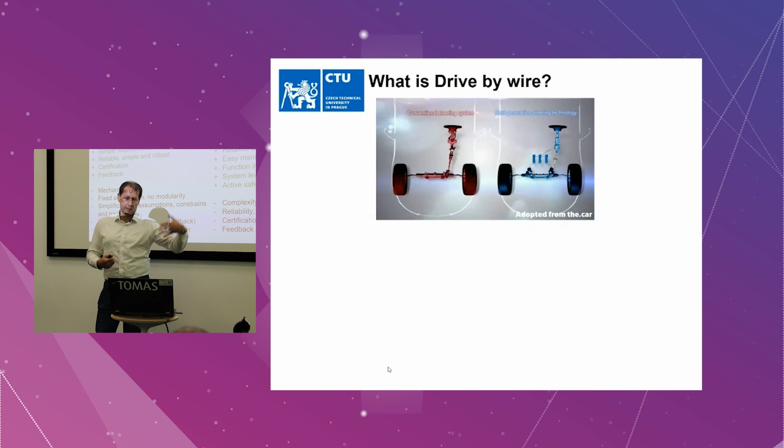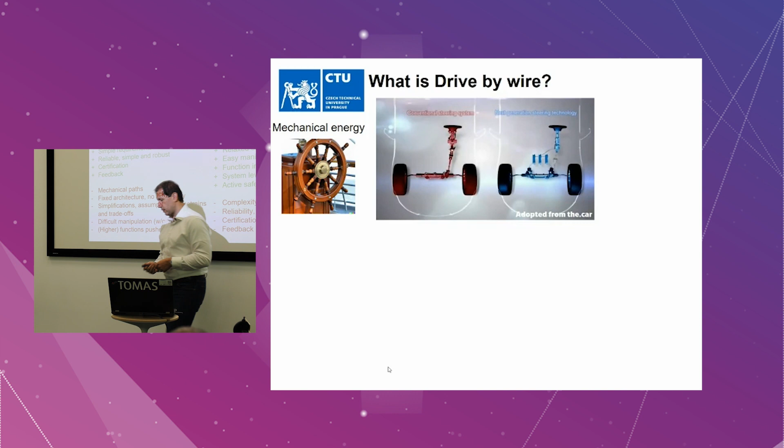So first, on the conventional setup, the simple requirements of the conventional setup are really straightforward: if there's a steering wheel and I turn it by some factor or value, I want my steered wheel to be turned by the same amount. That's as simple as that. Of course, today's systems, like electronic power steering, are more complicated—don't get me wrong—but at the end it's basically the transmission of mechanical energy from the driver to the system or to the chassis system.

Of course, connected to that, you have a really big chance or advantage in reliability, because you have a really simple and really robust system.

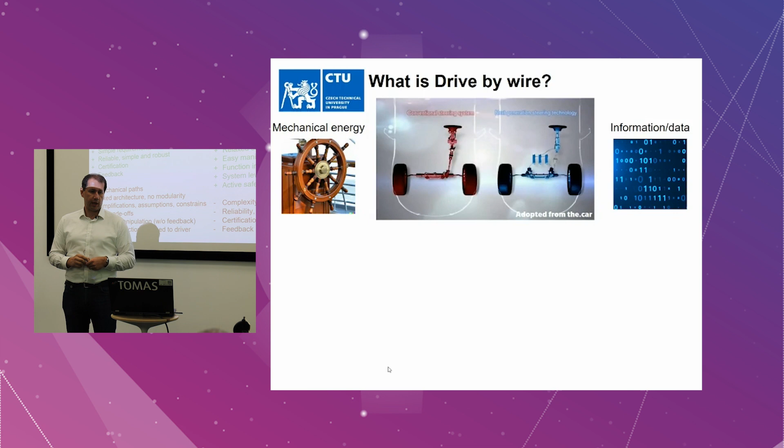That's of course playing in favor of the certification, because if you have a steel bar, as long as you don't mess it up and use a really chunky steel bar, then you should be fine. Feedback, definitely you have direct feedback up and down.

That's basically it. If you start to work through the process of the, I would say, really ingenious mechanical system, mechanical design, don't get me wrong, I really adore those systems. I believe they are really nice pieces of machinery. But basically, this is the limitation of the conventional system.

If you want to change anything, it's really hard, and it doesn't matter what it is. If you want to change anything on the level of the drive-by-wire system or steering system, brake-by-wire and drive-by-wire, meaning the propulsion, you have to change the mechanical parts. You need to have a steering column coming from the driver to the front wheels. If you want to have rear wheels steered, then again there needs to be some mechanical path from the steering wheel to the axle, which is quite challenging.

First of all, we have quite a lot of requirements for safety. There is a direct bar pointing towards you, not the best idea in a crash situation. The space in the car is definitely challenging, because you build a car and then somehow you squeeze a driver in there. First you have to make sure that you can drive the car and operate the car. So this is the disadvantage of that.

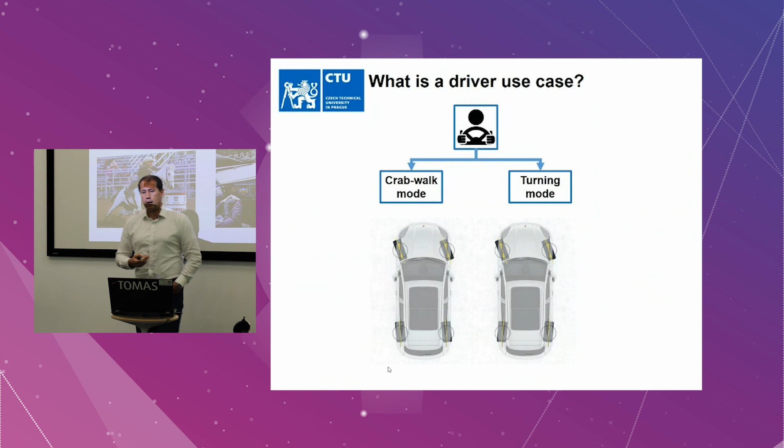The other example is the aerospace or aero. But that's a topic for the other speaker.

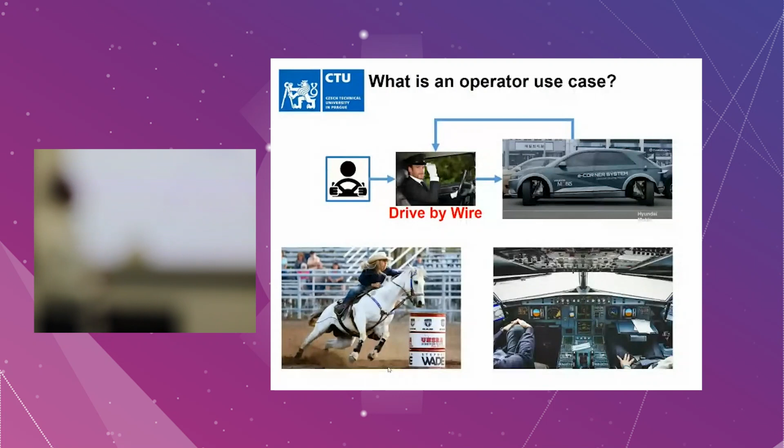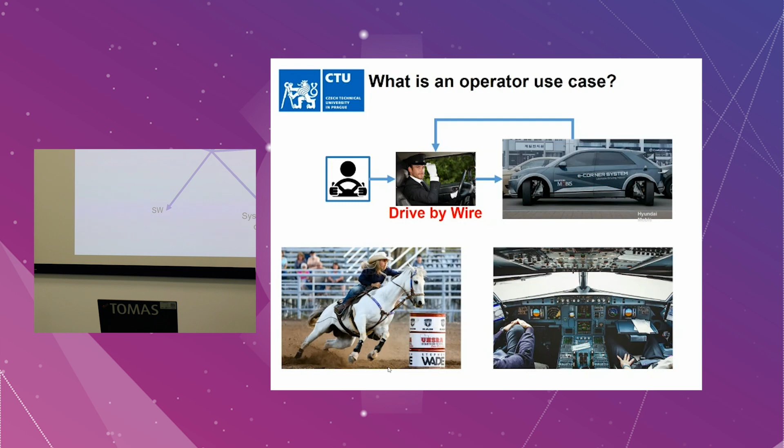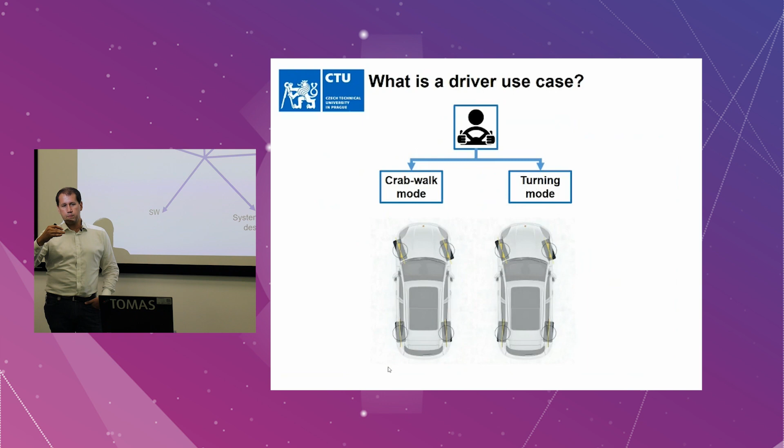Usually the worst part is the cost. Every manager, if we start to speak about drive-by-wire, they are really worried. And then when we come to the cost questions, they are really exhausted. If you are talking just about the cost, drive-by-wire system will always be inferior to the conventional system, because you just pay extra, and if you don't have extra functionality, it doesn't make sense to do that. So I think it's really important to understand the cost per function.

That's one part. The other part is safety, because nobody wants to read articles about accidents, car crashes, and how many injured or dead people. Again, if it is just the safety itself, meaning the reliability of the system, the drive-by-wire system will be inferior to the conventional car fairly easily, because you can always blame the driver. In this case, the drive-by-wire system is responsible for the safety, and in that case, it is the active safety. That's the first part of the story.

The second part is the redundancy. I didn't stress this out, but I hope it starts to be clear that if you don't have redundancy in the system, the drive-by-wire is again questionable, if you really need the drive-by-wire system or not. What I mean by redundancy is exactly as we discussed before: each wheel independently steered, each wheel driven, each wheel with a braking system for the individual wheel.

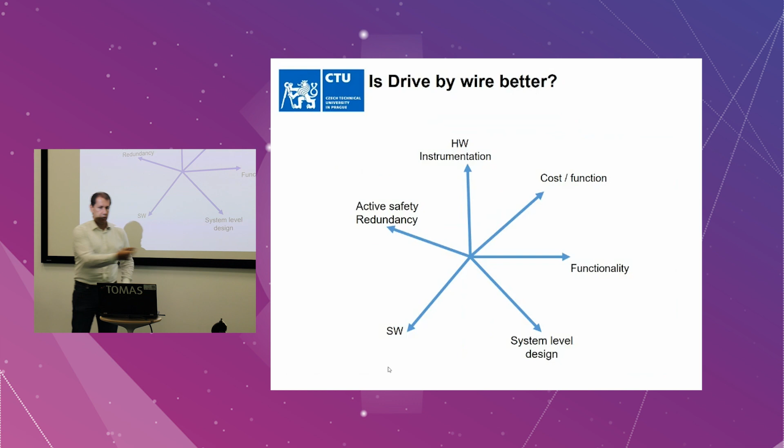So what about the other parts, the hardware instrumentation? That's something we will go through each time, because all managers are always really worried about this part, that you need an extra sensor, an extra actuator. Yeah, that's the price we have to pay if you want to increase the functionality, the ease of implementation of the new functions.

But frankly speaking, the hardware instrumentation - how different is the drive-by-wire car from the conventional car today? I mean, we have steer-by-wire. All luxury cars have rear axle steering, so that's steer-by-wire, nothing else, from the hardware point of view. Don't get me wrong, now we are talking just about the instrumentation and the hardware. So if I have rear axle steering, that's steer-by-wire, and it doesn't matter if it is rear or front. Frankly speaking, if we have an electronic power steering system, it is again by wire. We are just too worried to cut the steel, but at the end, if the software were implemented wrong, you can't really compete with the electronic power steering system.

So at the end, it's really important that the sensor registers the wish or command coming from the driver. Regarding the brakes, for ages we've had ABS and ESP, so we can individually actuate the wheel. Regarding the engine, if you have an internal combustion engine, usually we have just one, but if you really want to take advantage of active or regenerative braking, you need to have more.

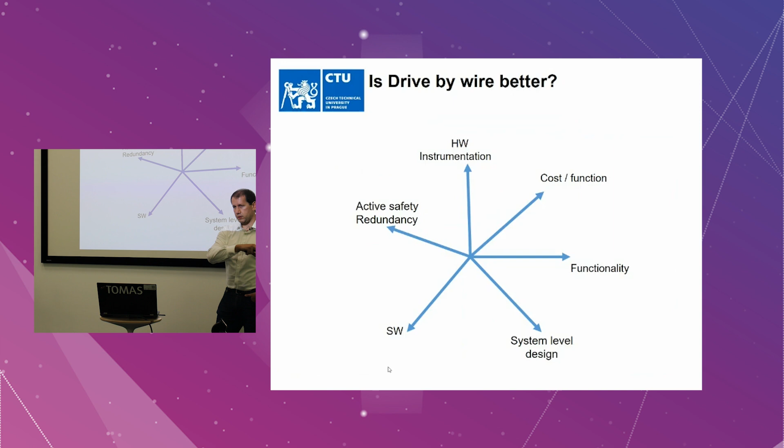So regarding that, that's basically covered. So what else do we have there? The functionality - we touched that a bit, but the functionality basically translates to the software design and system level design. As I said, the potential there is that you can go from the component level to the system level, and there is a huge potential basically everywhere.

If you were to design the power electronics, inverter or control, electric machine controller, you can't really increase the efficiency much on the component level. Right now we are at, I don't know, 90, 95 percent, something like that. For every percent or fraction of a percent, you pay a lot. If you go to the system level, it's a completely different story. That's what we'll be talking about later on.

About the software, at the moment the automotive industry has a bit of a crisis regarding software. There is a really nice example, Tesla. Even though I don't really like to use this underbelt argument, basically a few or many software developers came and said, yeah, I don't care about the conventional stuff, we will code everything from a clean sheet, and they managed in 10 years to be 10 years ahead of the conventional OEMs. So maybe there is something about that.

A colleague of mine, or my PhD students, were at the IEEE Intelligent Vehicles conference. It was in Aachen, and there were several speakers discussing this issue - and I'm not talking about the infotainment, I'm talking about the software of the vehicles. At the moment, the integration of all the components and the verification phase starts to be really expensive, and it starts to be almost unbearable to go.

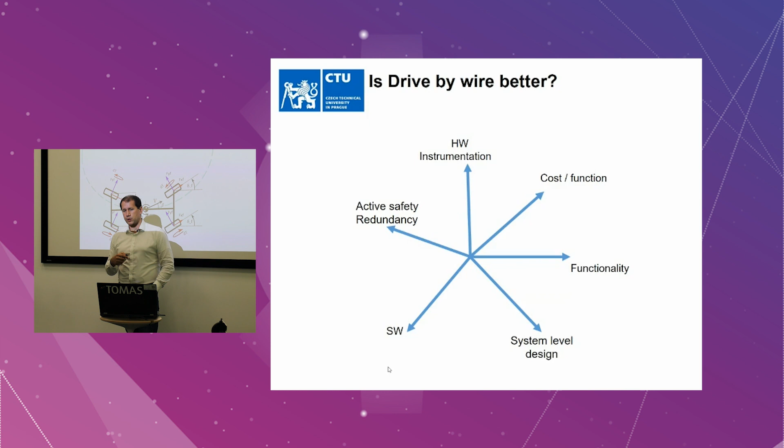And then we received, I would say, peculiar results. First we thought there was a mistake somewhere in the methodology, but it looks like there wasn't. We found that we can reduce power consumption in this scenario by 80%, meaning there is up to 80% of the power basically wasted in the lateral dynamics, or say the rolling resistance induced by lateral dynamics.

Regarding active safety, it depends on the configuration, but there is basically a 30% increase in the maximum value of lateral force compared to the conventional setup.

And definitely the maneuverability depends on the maximum steering angle. In this case it was 30 degrees, and we received up to 40% improvement in maneuverability.

So we took those results and said, okay, but we need a system to provide us with the functionality. Again, we are coming to the functionality, which would confirm those results. But this is, as I said, just a steady state maneuver.

But there's more you can do. If you have redundancy, you can have zero emission transportation. The biggest issue with zero emission, basically Euro 7, even though it was revised, it doesn't matter—the critical point at the moment is the tires and the brakes, the friction brakes.

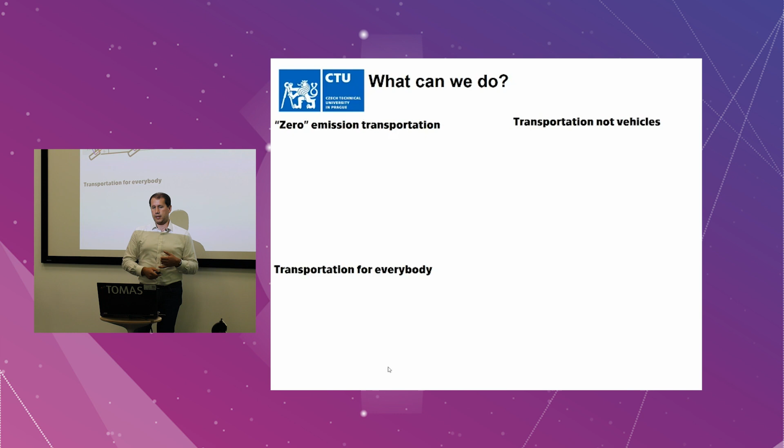He proved that basically with this system, first of all you will just tear your tires apart, but eventually you would stop the car. This is the emergency maneuver—if you are going downhill and you want to stop by any means necessary, you can do something like that if you have redundancy. And basically the system I will be talking about later provides this functionality right away, because of the way it's constructed.

Okay, then transportation not vehicles. If you want to transport or move your house—I mean, we are in Czech Republic, we are moving churches, right? So this is nothing. So what are you going to do?

You have to develop a new vehicle. You have to develop some chassis, something which will hold the car, what you can put the church, or in this case just a house, on, and then you can drive. So basically you are building a vehicle suitable for the job. This is another example.

Again, our approach is that if you have drive-by-wire, it doesn't matter where you put your wheel or wheels. It's referred to as a corner module. This is an example of a corner module coming from Hyundai, but there are plenty of others. I believe the first patent came from Siemens, but I may be wrong—about 15 or 20 years ago.

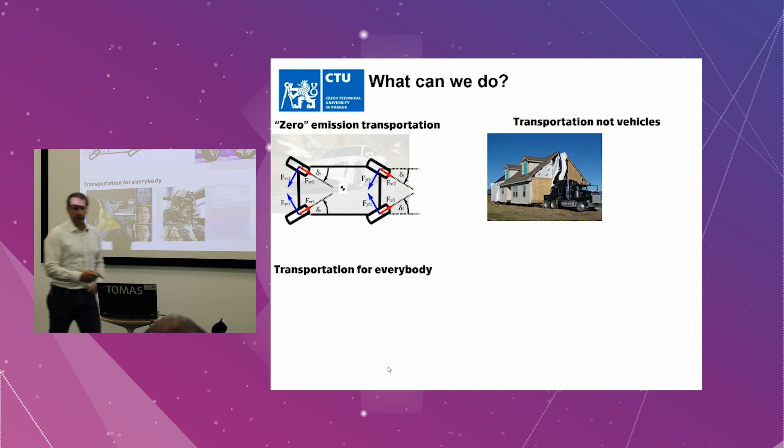As I said, it was built for the car, and then the human is somehow fit inside. So we can have completely new possibilities with the drive-by-wire system for the HMI.

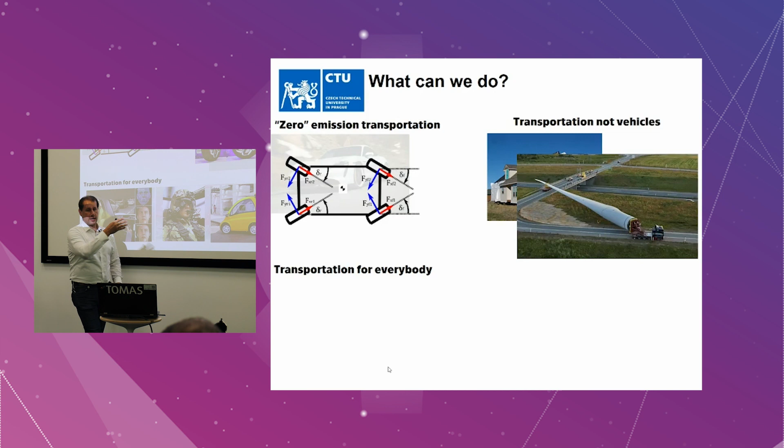By the way, this is your system, coming from Valeo, where basically the military application is that it can track the movement of the head of the pilot. In that case, it's used for aiming. But if it's working for aiming, it can be used to aim the car.

And in that case, you don't need your feet, possibly your hands, and it also relaxes the constraints for the construction of the vehicle.

Let me go really swiftly through that, it's a bit of physics. As I said, we are dealing quite a lot with the over-actuated, that's the keyword, meaning that we have more degrees of freedom per motion of the car. I can use the steering wheel steering of the front axle, rear axle.

I can have the differential braking or actuation of the car. But eventually, the ultimate parameterization of the vehicle, or any body in the plane, is in this case speeds, and that's unique. So here we have the longitudinal, the lateral speed, and the cornering speed, the yaw rate.

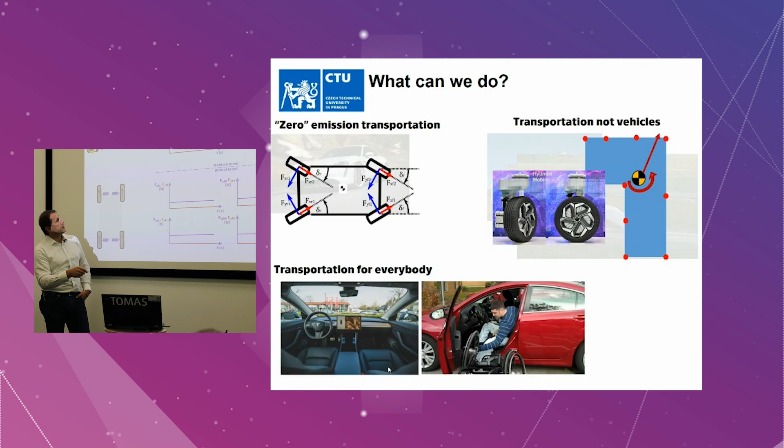And this is something we want to have. It means that we want to accelerate straight, as simple as that. How to do that? We need to produce a force in the CG. So all that is generated at the CG. And as I said, we want to go straight, so there needs to be just one force in the CG straight ahead.

How to produce any forces on the vehicle? We need to use our tires. So we place the brakes, if you want to slow down, we place the electric engine there. But you have, even now, an infinite number of possibilities how to distribute the traction force on the wheels in order to receive this one.

The transformation from wheels to there is unique. That's fine, that's physics, physics takes the hard part for us, solving all the differential equations there. This is a rather silly example, but you can see that this force is the same, even though I did some really strange configuration, and the resulting force is still the same.

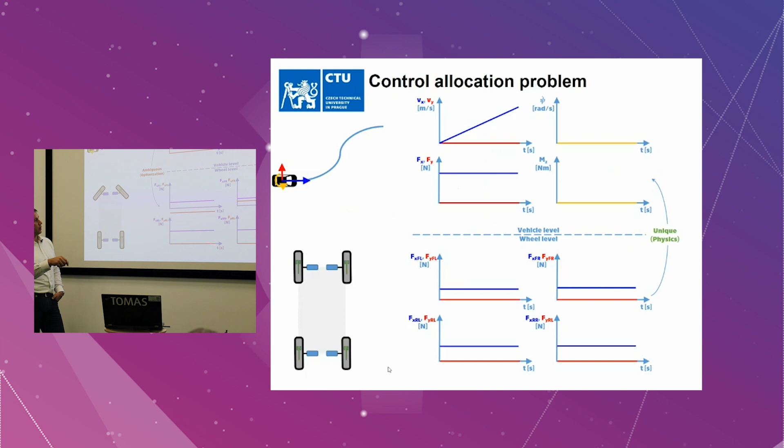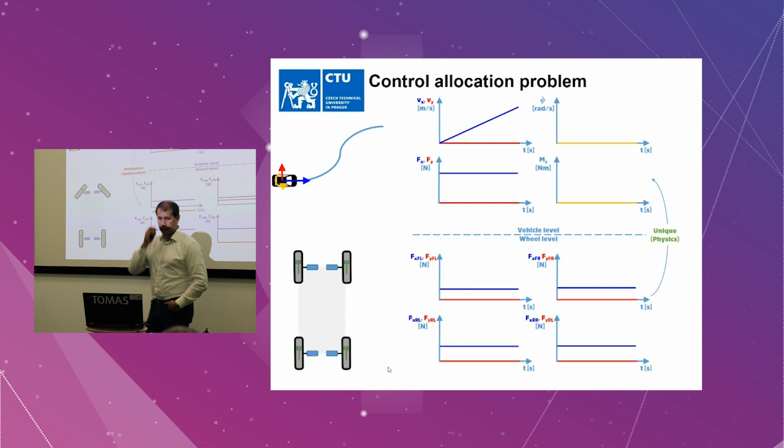So the question is how to go from this force, basically how to go from the CG to the wheels, and that's really hard to do. Usually it is done with dynamical inversion, which is, I would say, quite unrobust because it relies on the model of the vehicle. We did that in a different approach.

From now on, basically you can skip that because this will just be me talking about our stuff. So what we did is, again, just forget about any constraints coming from the architecture of the vehicle, and ask what is the best coming from the component level of the architecture of the vehicle, what is the best way to parameterize the motion of the vehicle?

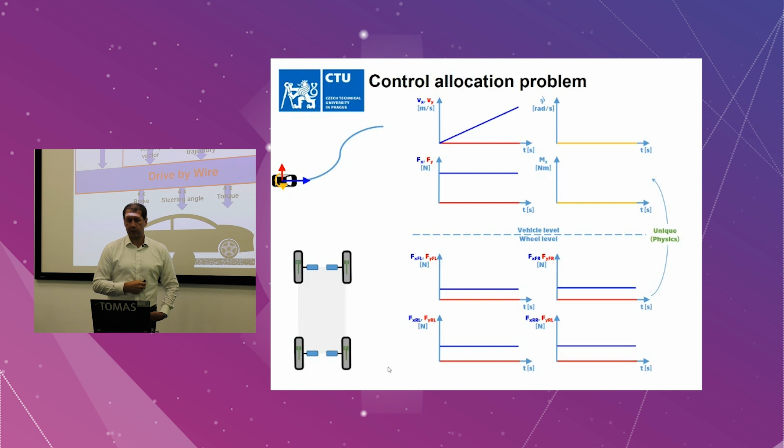We already discussed that, that would be those three velocities, so I call it the vehicle velocity vector. This generalized, there, doesn't matter. And then we want to go from here to there in a way that would respect the inversion problem of the car. Let me just go really quickly through that, because this is basically some technical stuff, how it's done.

And thanks to that, we call that the feedback control allocation problem. The control allocation problem is the fancy word for how to allocate the traction forces, for example, and we can do that via the feedback. In that case, the system is fairly robust, fairly simple. We have the complexity of a bit more than an ESP system, and it provides the vehicle motion control. So you prescribe the motion of the vehicle, and the feedback allocation control system will provide you with this functionality. Again, functionality is really important stuff.

What you pay for that is you need an over-actuated, relaxed system. Otherwise you reduce the possible performance of the system. The other benefit is that it's fairly modular. It doesn't matter how many wheels you have, as long as you know where they are. You need a position vector to each wheel, and that's it, you don't need anything else.

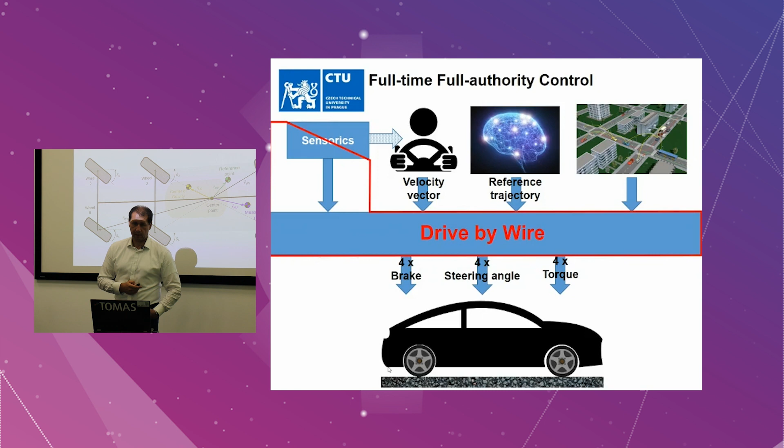So this is really suited for corner modules of the car, but not only that, it can be applied elsewhere too, as long as you have a certain degree of freedom. For the Škoda Fabia, for example, there is no extra degree of freedom we can benefit from, so we can't use that.

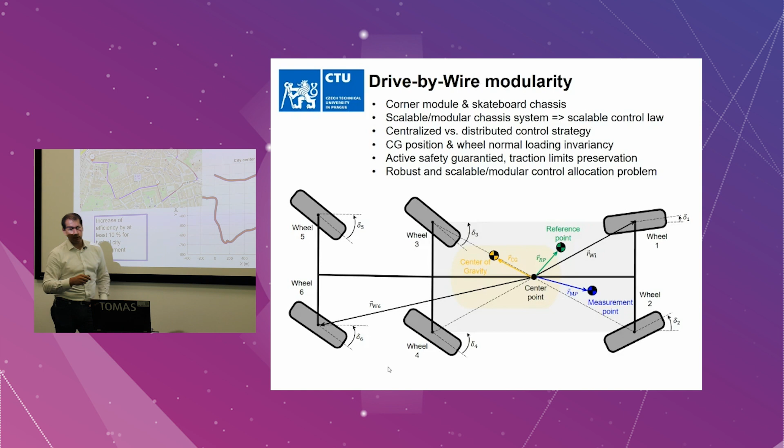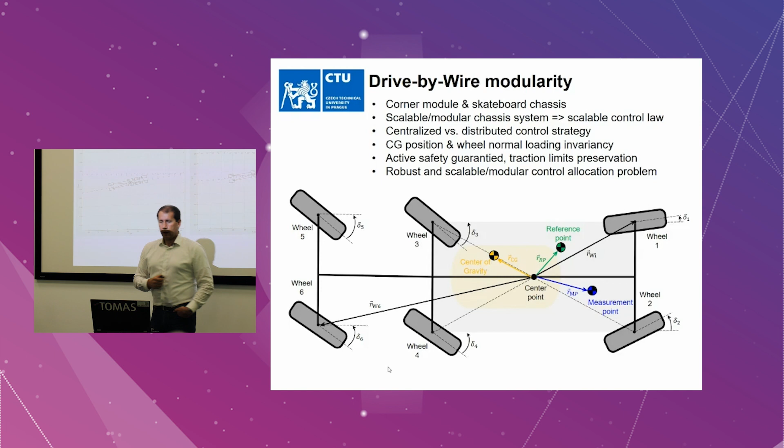As I said, there is plenty of reserve, energy, or power to be saved in the lateral direction. Somebody told me, okay, if you're on the highway you don't care, you can see that it is fairly flat. You have several turns. Okay, still we managed to have about 10% reduction, or increase of efficiency of the vehicle.

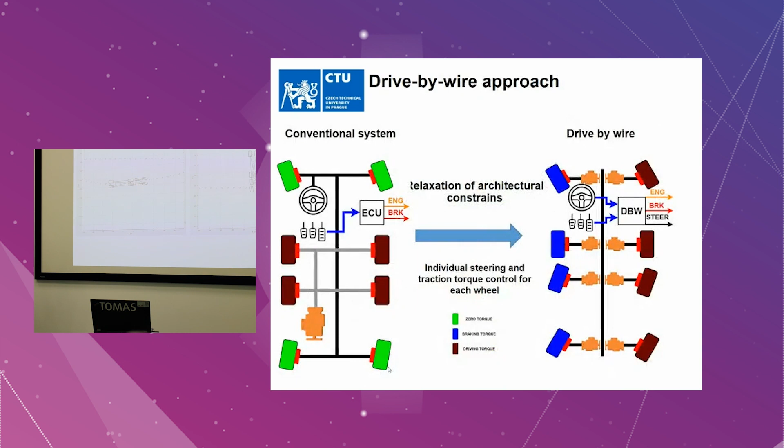There are plenty of benefits and drawbacks. Don't get me wrong, it's always up to you to say what I need, what are my requirements. If the requirement is the driver steers, turns the steering wheel, turns the wheel on the tarmac, that's it, you don't need a drive-by-wire for that. I think that's it from my side, if you have any questions.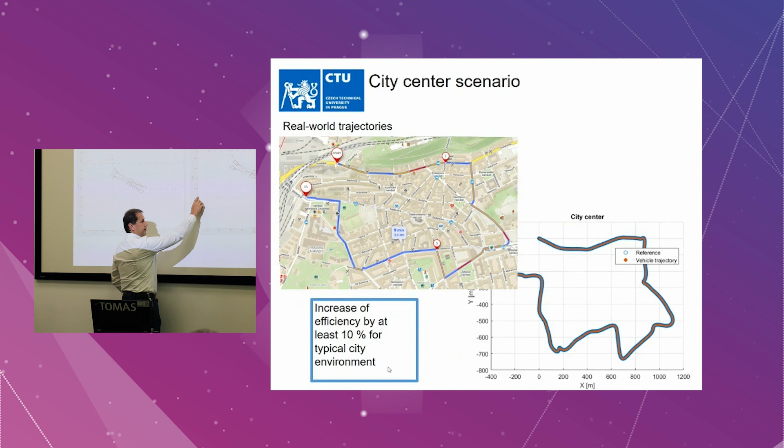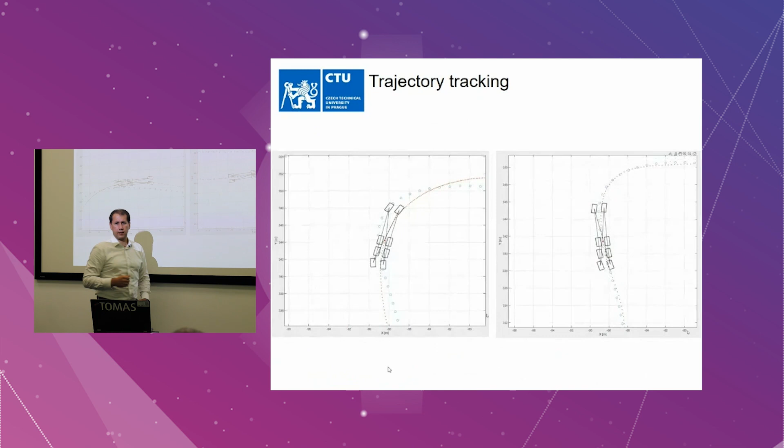I have a question: is that real time, or do you know the trajectory in advance? That's a really good question. Yes, in this case, because if you have trajectory tracking, the biggest issue is that if you have just the feedback system, let's say this is the reference trajectory, if you have just the feedback system, you will pass this point and then you know that something is wrong, and then you start to steer the car. So you need to have what's called look-ahead information, otherwise you can't have that functionality. So we have look-ahead information. Yes.

From the praxis point of view, it means we are like 20 years ahead, yeah? Or behind, yeah?

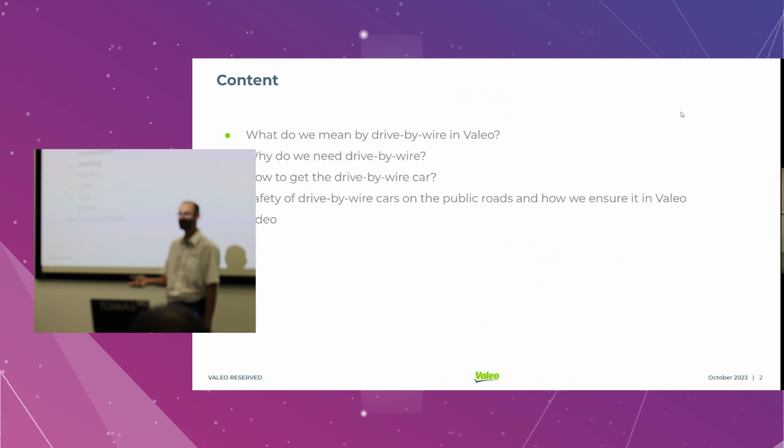So what do we mean by drive-by-wire in Valeo? It's a system that I can control, not over wire, but over some bus, in most cases CAN bus. We can control the movement of the car, so we would like to control the braking, the acceleration, the steering. But not only that, we would also like to maybe change the gears, like to switch to reverse. We may want to turn on the lights, maybe horn somebody, or control the wipers to, for example, clean the vision of the camera behind the windshield. So all these things we would like to control from the computer or from some embedded ECU. That's what we understood by drive-by-wire in normal combustion cars, the cars you can buy on the market. Why do we need it? Because it's something like a must-have for ADAS development, for driver assistance systems.

We at Valeo produce the sensors, the cameras, radars, lidars, whatsoever, but we need to join these sensors with some functions, because that's the motivation when somebody would like to have it in the car. They would like to have an emergency braking system or adaptive cruise control system. They don't care which vision the vehicle uses, if it's based on radar or camera. They would like to have the function.

On one hand we can use simulators to develop the functions in computers and hope that it will work in real conditions. Or we have to test in reality, and it's always better to test in reality, because then you will find cases you cannot even imagine behind the keyboard. So all the functions need to be proven on test tracks and in open road traffic conditions from the real world, because our cars are driving in the real world.

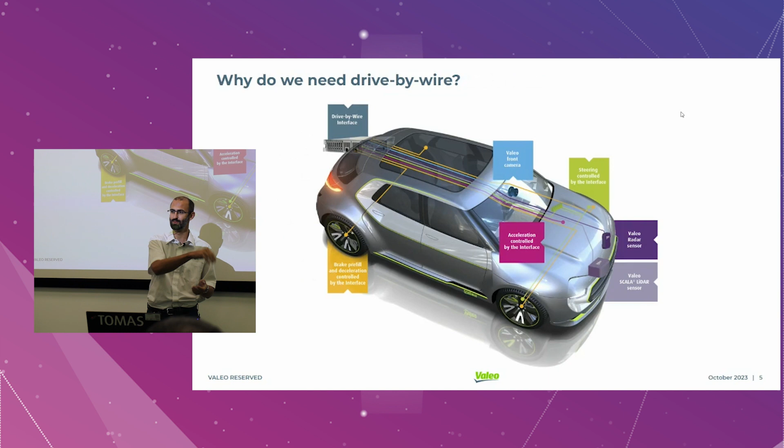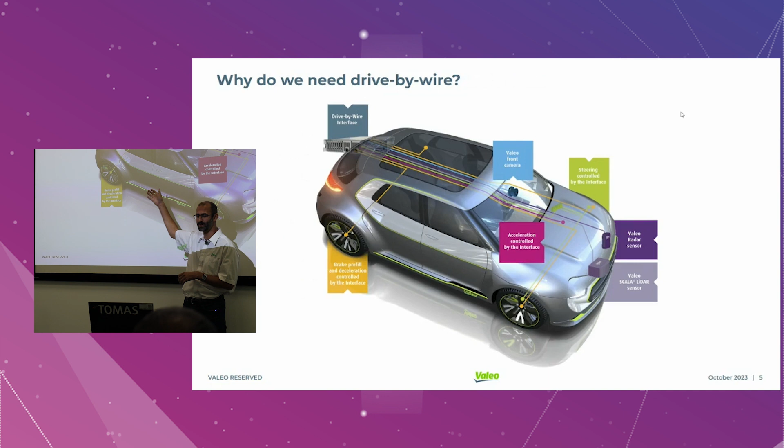And therefore we need something that tells the car, now it's time to brake, and the car will really brake. So for us, we abstract it under the term drive-by-wire, where I will try if this is working. Maybe not, I don't care. But the gray box behind is our computer that hosts the drive-by-wire system, capable of controlling the engine to accelerate, or controlling the brakes to brake, or controlling the steering wheel based on our commands. So this is the motivation why we need it, and how to get the car.

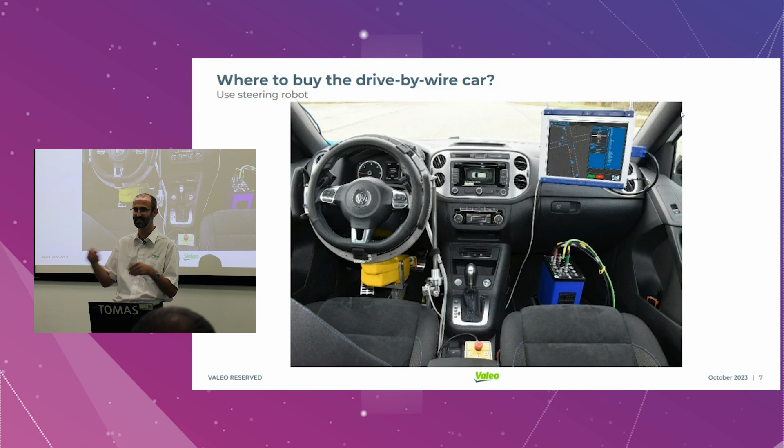It's quite tricky, there are several options. You can buy the steering robot. It's done mostly on every NCAP testing. If you have the star rating for vehicles, how safe they are, you need to repeat some test cases every time, the same way. This is something a human driver cannot do efficiently. So you need the vehicle controlled over some trajectory that you define, and therefore there's an actuator you put on the steering wheel that turns it for you. There are actuators touching the accelerator pedal and brake pedal, and you verify what the car will do in these conditions. But it's quite unhandy to sit in the car when there's this steering robot.

So there's another option. You can buy a solution from companies producing cars for disabled road users. You can buy a certified system, everything triple redundant, an ASIL D system that you can control the car with just a joystick. You will replace even the steering rod with some engine. You will again have actuators touching the brake and accelerator pedal. There's one issue: the system was designed to control the vehicle fully. In case you ask the car to kill you, it will just kill you. I mean, you are driving on the highway at 130 kph and you ask the system, okay, now it's time to fully steer to the right. It will steer and you are rolling over. There's no way to prevent it, because it's a triple redundant system. So once you send the command to kill me, it will kill you.

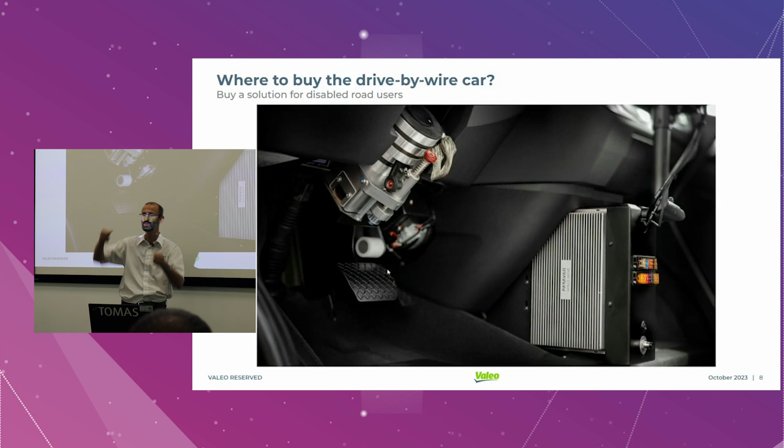You don't want to kill yourself in the car, but you are creating software that is full of bugs, and the bugs will kill you. So this is something we would like to prevent. And when we bought the solution for one of our cars, there was an issue really with the steering. It was very hard for the human driver to overpower the steering of the system. So we considered this car unsafe for public usage, and we use it only on the test track.

The next option you have is to ask some engineering company or university to create such a car for you. There are engineering companies capable of doing it, but it may end up in a situation where they fill the trunk of the car with this technology, and there's no place left for your systems.

We use this way, as it was the only suitable option on the market: using the existing vehicle actuators. The throttle in the car is controlled electronically, there's no more mechanical friction, so you can use this electronic actuator. You can use the braking system to just send the brake command over the CAN bus, if you know how. And the same is with the electronic power steering. If you understand the logic inside the steering ECU, you can turn it into a mode that works for you. So if you have deep knowledge, you are able to adapt the car to your needs. And as I said, there are a few companies able to provide you with such a car.

But it's expensive - there is quite a lot of engineering, and there are not that many companies buying these cars. So we initiated a joint project with University of Ostrava to create such a system for our needs. We got a much better price, and since we had the opportunity to directly influence the development, in the end the system was this size - just the flat space in the trunk on the side, which is normally not used.

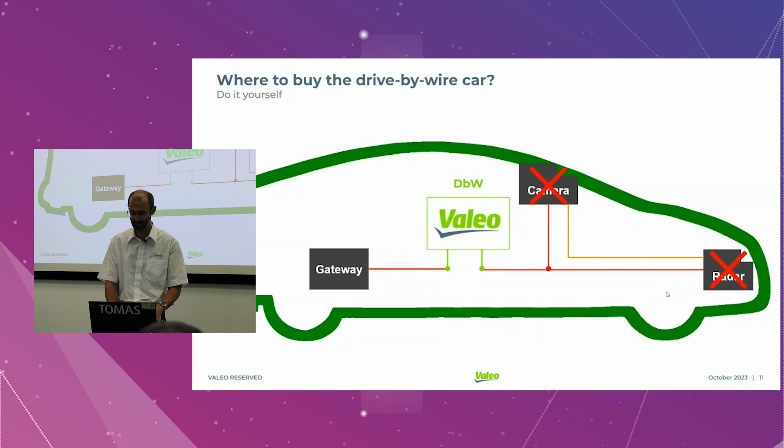And that's it. Then the next step is how to get such vehicles on the roads, because if you are doing such modifications, you are completely breaking all the homologations, so you cannot drive on your license plate. So then there's a process - firstly you have to ensure the safety for yourself.

This is how we do it in Valeo. Firstly, the vehicle provides you some signals about its speed, steering wheel angle, wheel ticks, how the wheels are rotating. We read all these signals, and we ensure in a device we call a one-way gateway that we will not modify these signals in reverse order, or if we generate something behind, that it's not propagated back to the car, that we will not get the car into an error state, or disrupt the communication between existing ECUs. So this is one way - only reading access for the signals.

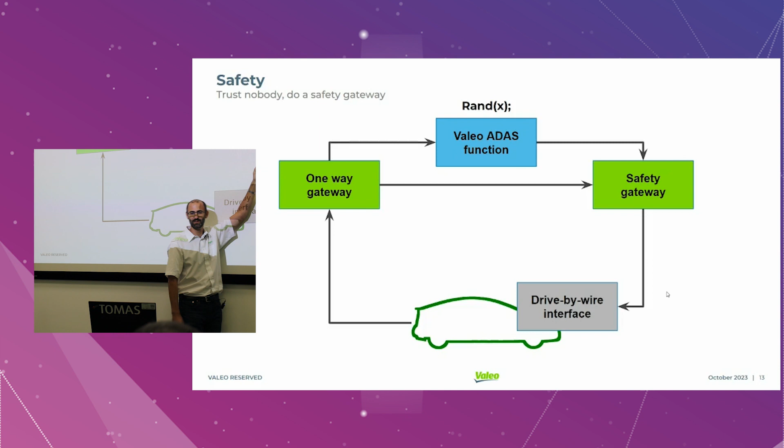Then we have in the blue box some Valeo ADAS system that's most probably full of bugs, because it's in the development phase where the system is not fully tested - it's a very early prototype. In an extreme case, you could put there just a random signal generator that's driving the car, and it would still be considered safe, because you put there a safety gateway that filters all the control commands that your blue device provides. You verify if the control signals make sense, if they are in a safe range, and only if they pass through the safety gateway is it accepted as a control signal to the drive-by-wire system.

And the main benefit is that you verify this system just once. Because if you do solid verification of it, you can replace the blue part multiple times - next software version, next software version, next software version - but as long as the green part is safe, your vehicle is still ready to go.

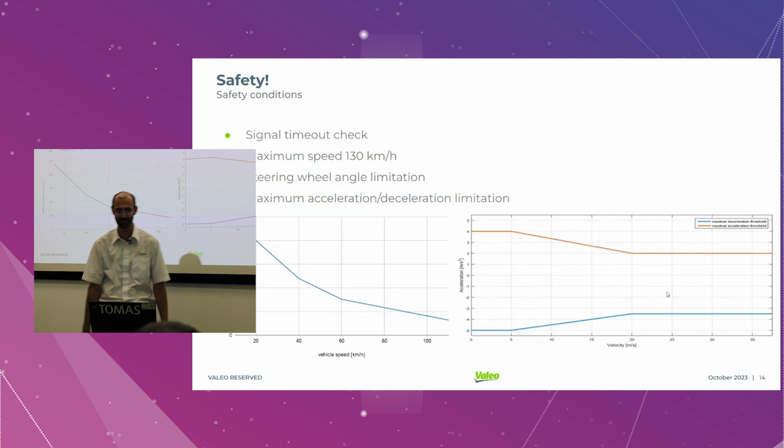So what this safety gateway does is several checks. Firstly, we verify whether the signals are there, whether they are updated - so all signals need to have a CRC, a checksum, and a message counter. And if you are not receiving the signal for longer than 100 milliseconds, you force the vehicle into a safe state where it's no longer accepting the signals.

It may happen that the ECU from the control system just crashes and gets stuck. You don't want the vehicle to continue with constant acceleration. In that case, the vehicle will just stop accelerating and report to the driver that the control system is out of order, and the human driver sitting in the car takes over.

Then the next step is the maximum speed check. Because we are in the Czech Republic, we would like to comply with common regulations on the road, so there shall be no way for the control system to violate speed limits. Of course, German colleagues ask us why we have these conditions, since we cannot fully test it on our highways. But let's say we are working for Czech testing, so as long as we are testing in Czech countries, we have a Czech procedure. If you go to Germany, then do your German procedure, and you can validate this condition.

And then the tricks to ensure safety are these two graphs that are speed dependent. Firstly, we would like to verify that as your speed is rising, you are limiting the maximum steering wheel angle available on the steering. The faster you go, the smaller corrections you shall do, because otherwise you will roll over like from Cobra 11.

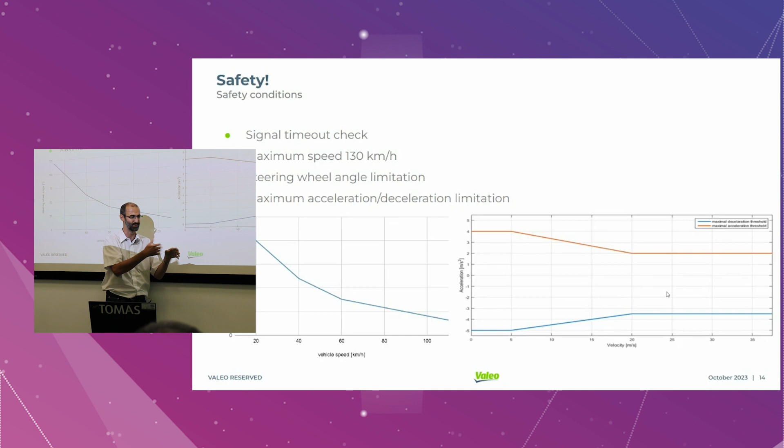So this is one approach, and the second approach is limiting the maximum acceleration and deceleration. You don't want to feel autonomous emergency braking on the highway in heavy traffic, because otherwise the people behind will kill you, or crash you in the better case. So again, based on the speed, you are limiting the maximum deceleration and acceleration that is allowed.

The maximum acceleration is not that critical because a vehicle cannot accelerate that much unless you have some sport car. But we are limiting to 4 meters per second squared, and this is something you can usually do with speed less than 30, and then it's limited for normal cars.

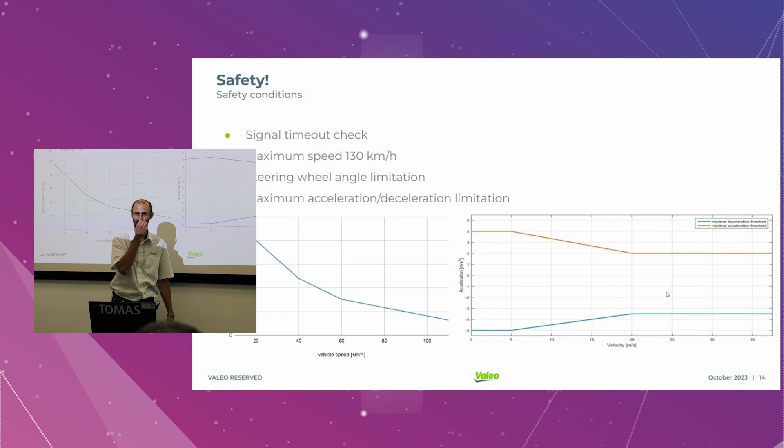Next step is to test it. Therefore, we have our polygon in Milovice, where we have a 2.5 kilometer straight runway where we can do whatever we want.

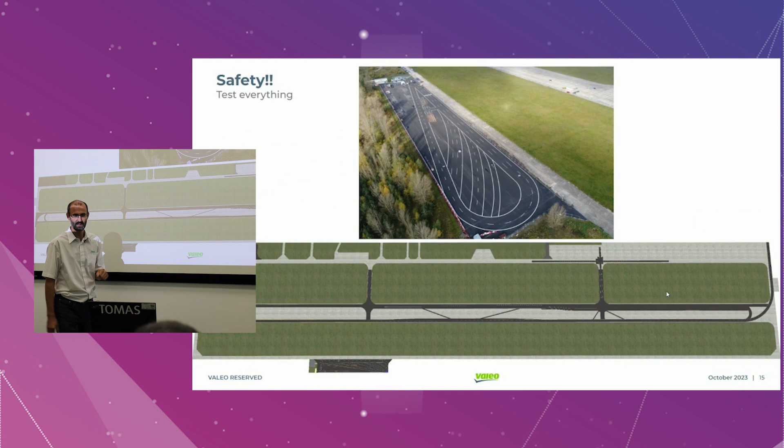And these are some pictures of how it looks there. We really spend whole days, sometimes multiple days, testing whatever scenario we can ask for the drive-by-wire interface through the safety gateway, to check if it's really safe. Only if we pass all these tests can we consider the car safe for public usage.

And then comes the legislation. In Czech law, we have the F plates. It looks like this, it's green. And if your car has these plates, you don't need to have homologation. You don't need the technický průkaz paper, I'm not sure of the English term, but you just need to fulfill these three requirements.

You shall comply with electromagnetic compatibility, so you are not producing noise so strong that you will cancel all the policemen's radio stations - they will really stop you. Also, you shall not have any sharp edges on the car, for pedestrian safety. And third, you shall have lights that are according to Czech law.

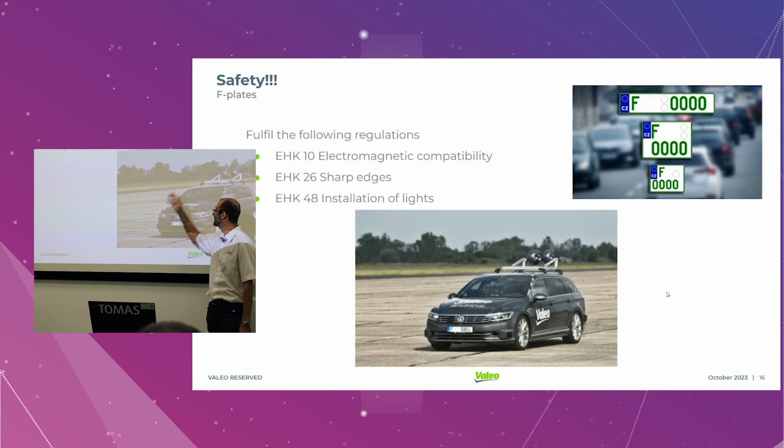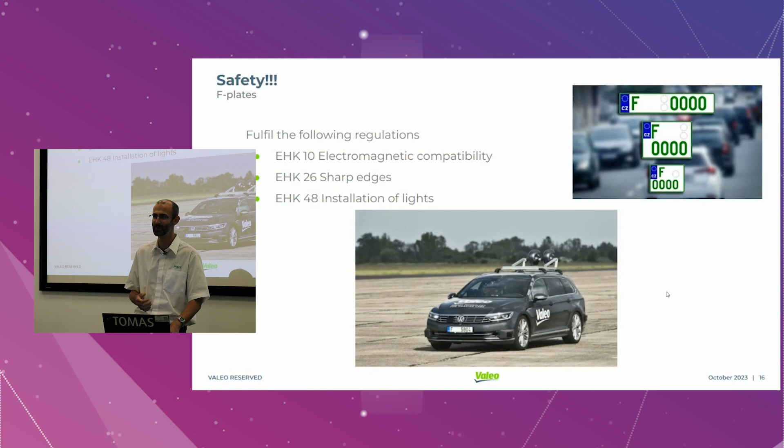Once you fulfill these three, you can do whatever you want with the car and you are okay for road usage. You can, for example, replace your windshield with a wooden desk and not care that you don't see outside. But everything you do wrong with the car goes to your company, and if the Ministry of Transportation evaluates that you did something wrong, they will just take the F plates from you and no more testing for your company. They will remove all the plates, not just from one car, but from your entire car fleet, and you can close the business.

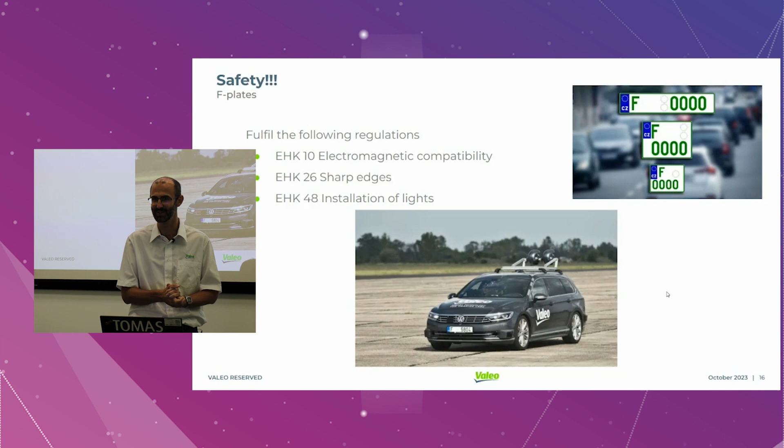So you must be very diligent about what you are doing with the cars with the F plates. For everyone in the audience, if you spot a car with these plates on the road, take attention - it's a prototype car. The things the guys are doing inside can look crazy, but they are just testing our functions, or maybe these are Škoda guys testing something else. There are several more companies privileged to have these plates, but our process is that once we have the plates on the cars, we really know what we are doing, and safety is our highest priority.

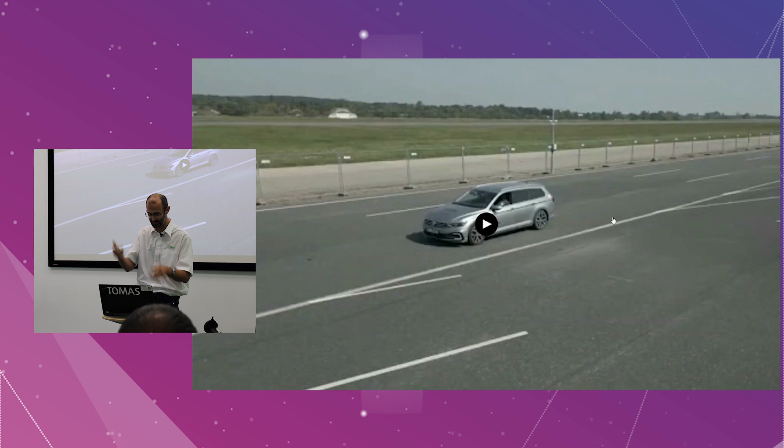Okay, there is no other use case than just to amaze the public that we are capable of this. Yeah? We will never sell it.

Second video I will comment afterwards, because there is a lot of text and you will be reading the text and not listening to me. It's Tatra, and we have the privilege to have this vehicle next to our buildings, and we are using it. So it was created in cooperation again with the University of Ostrava, that created the interface there.

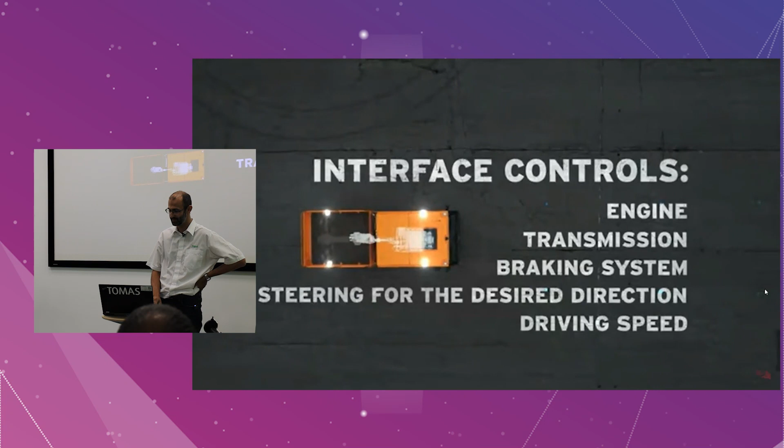Basically they created it according to our requirements, therefore I am highlighting it there. But the main thing is that we are not speaking only about passenger cars. We are speaking also about the heavy machinery.

Okay, so this is the last slide from my presentation, and now is the place for your questions. I told you I will be quicker. Okay, thank you very much, Tomáši. And do we have any questions, Tomáš? I know about one question.

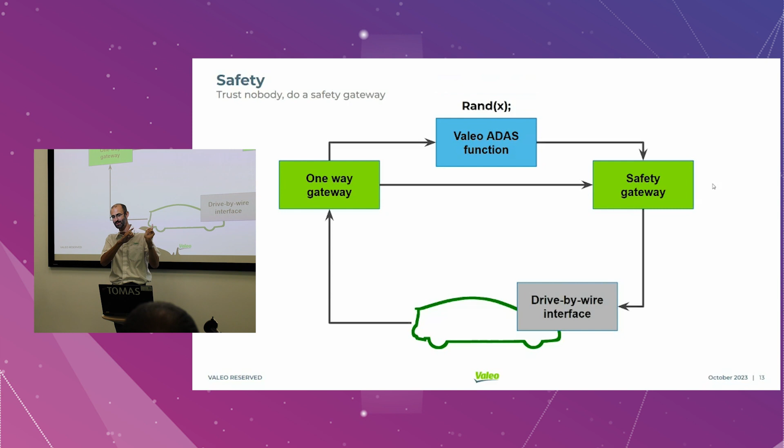Okay, I will translate to English. I hope I have caught the question, if not, then please correct me. So there were two questions, and I'm not sure if it was to our system or to the serial system, but the question was how big is the delay till the control system reacts, whether it lost the control. Am I right? So in our case, it's about 100 or 200 milliseconds. But if you are in the commercial sphere for emergency braking, because you were asking for emergency braking...

it shall be something similar, like that you lose one or two messages in the sequence. The messages are usually going every 20 milliseconds or every 40 milliseconds, and if you lose 2 or 3 consequent messages, you consider it false. So with this, we are compliant. Oh, we are in milliseconds, yes? Milliseconds, yeah. Okay, thank you very much.

And in our system there is also a recovery state, because it may happen that the system recovers, and in this case we are waiting the following 10 seconds till we allow control to the system again. We have more conditions. For example, if the driver presses the brake pedal, whenever during testing, it's always disabled for 10 seconds at least. If you press the throttle pedal more than 95%, it means like kick down, which means we would like the car to do something else, so we are switching off the system for 10 seconds.

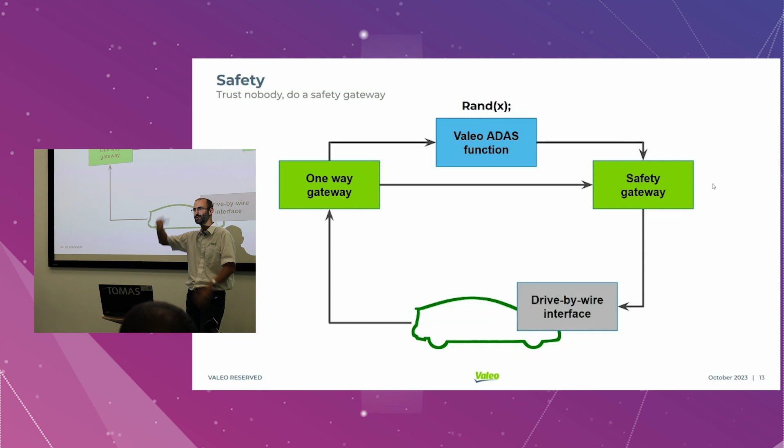Okay, the real use case for remote controlling Tatra vehicles, I would say it's from the defense industry, where you can use it for autonomous convoys. But the second use case is for mining, for example, where you can have an automated fleet of vehicles inside of the mine, with a supervisor system controlling which vehicle goes where, for automatic loading of the soil, and moving it to another place where the cars will automatically unload. So this is one real use case. Both of these use cases have really been used for more than 10 years already.

I really appreciate it. So I'll talk about multivariable aircraft control using dynamic inversion. Basically, I've been working for Honeywell for about 5 years now, out of which 4 years were on what we call the compact fly-by-wire project, which is basically a little box that you can fit into light aircraft, let's say 2-seater or 4-seater aircraft, which normally didn't have fly-by-wire before. And well, we're now basically designing this to be universal and adaptable to different kinds of aircraft.

And similarly as with the drive-by-wire, there is no advantage of putting such an expensive system in, let's say, a Cessna or an aircraft that can fly without it. So our use cases are now mostly electric vertical takeoff and landing aircraft. And I'm unfortunately not allowed to talk about the current project, so I'm gonna mostly give you some general background, how this works in general, just some math, and talk a little bit about some past examples where this has been used.

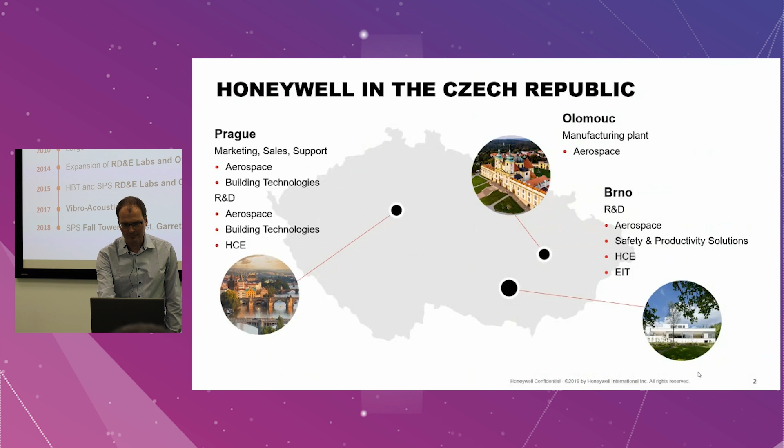So first, let me introduce Honeywell in Czech Republic. We have three main sites. The main site is in Brno, where I've been based most of the time, but I recently moved to Prague, and we now have a small engineering team there too. This is the history since 1993, basically.

In aerospace, we mostly do autopilots for business jets, general aviation, helicopters, and now also for what we call urban air mobility, these future air taxis. We also do some space development, a different team than mine, but basically a lot of data link and internet through satellites for aviation.

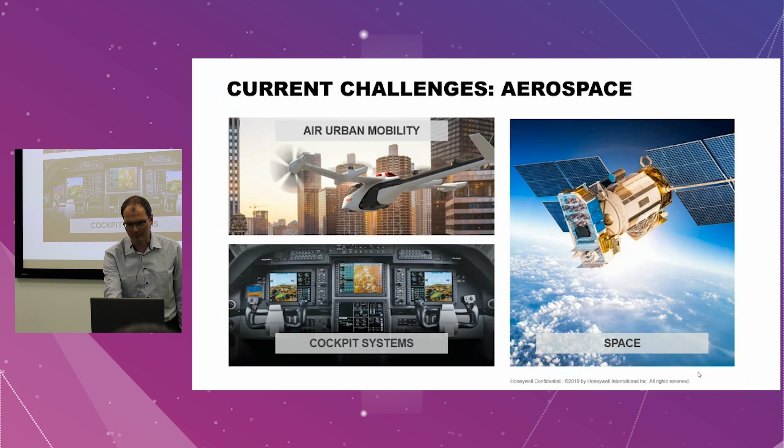All right, now starting with the main topic. Basically we're using feedback control, so we're reading something from a sensor or sensors, acting upon it, and then commanding what we call effectors, which I'll talk about shortly. Basically those are different devices that can somehow change the trajectory of the aircraft, producing forces or moments acting on it.

The pilot usually only has two hands, so the pilot can command at most four engineering variables, if you will. For example, they can command velocity forward, lateral, up, and then maybe one angle, or they can command acceleration forward, change in flight path angle, or change in track, etc. So they only can do a limited amount of commands.

On the other hand, the aircraft has a lot of effectors, sometimes 20 or more for these electric vertical takeoff and landing aircraft. They have a lot of rotors spinning independently, and they can sometimes tilt, or change the angle of their rotor blades, etc. So all that has to be controlled automatically, because the pilot wouldn't have the capacity to do it manually.

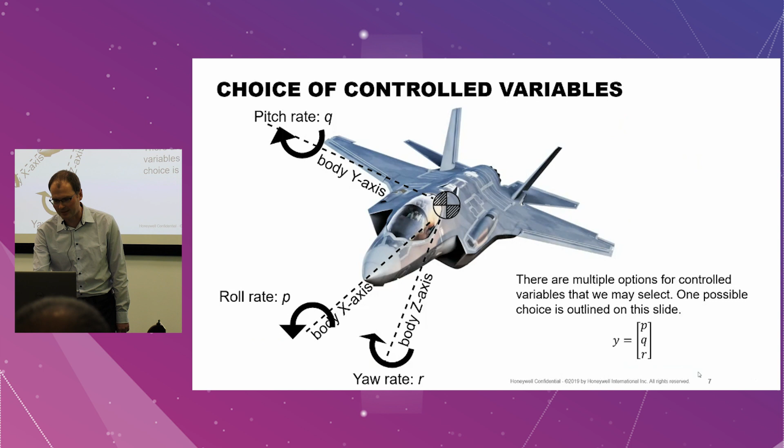But it's a good example because the F-35 has a lot of effectors. To define what effectors are, they can be control surfaces, like these flaperons, for example, that can move up and down, creating basically a vertical force, which will then induce a rolling moment on the aircraft, mostly rolling moment, but in all three axes. And you can also have the engine.

The engine can increase or decrease the thrust. It can also be vectored by swiveling the nozzle in different directions. You have this lift fan in the front, which is connected to the engine, but also controlled independently, so you can generate different amounts of force in the front.

This is the F-35B, which is basically the vertical takeoff and landing version. Then you have further control surfaces, and then you have these roll posts, which basically blow air, so they can create rolling moments. So with this you can control the aircraft also when it's hovering, stationary. Your control surfaces, which are the aerodynamic effectors, don't have any effect at low speeds because they need air blowing over them.

This is an example where, if you sum up all these degrees of freedom, it's a lot. The pilot will not be able to control all of them. So we need some system that's going to do this control allocation, distributing the pilot commands into the different effectors so that the aircraft responds the way the pilot is asking it to, and so the pilot can control it more intuitively, because they can control something directly related to where the aircraft is going to move, instead of controlling different RPMs or different degrees of deflection of different surfaces.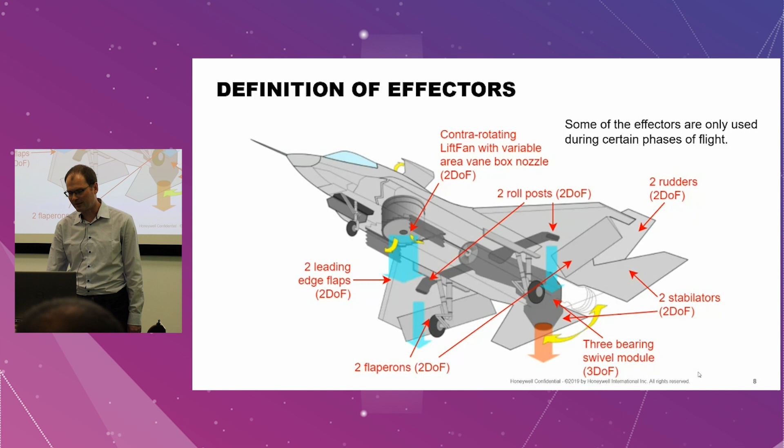Okay, now let's add a little bit more to our feedback response. Unfortunately, the world is not perfect, so we have these different disturbances that act on the aircraft response. An example disturbance could be turbulence, or just a change in the wind, which happens all the time - we call it wind shear. It could also be any kind of imperfections in the response of the effectors, so they don't necessarily always respond exactly the way that we ask them to.

Then once the aircraft somehow reacts, we measure the reaction, but the sensors are not perfect. They have some noise in them. They can also be subject to other kinds of errors that can be oscillatory, or a steady bias, or all sorts of different errors. So what the controller has to work with is not perfect, and we need to be robust so that even in the worst combination of all these errors together, it's still going to be stable, and it's still going to provide the response and the command tracking that you require.

I'm going to skip over the math, but the idea is that we have this sensitivity and complementary sensitivity, two metrics that tell us how much we react to disturbances or to noise. At low frequency, we are concerned about disturbances because we need to be able to compensate for a change in the wind direction, for example. We need the aircraft to reject that - it needs to keep going where it's being commanded to go, and not just let the wind blow it somewhere else.

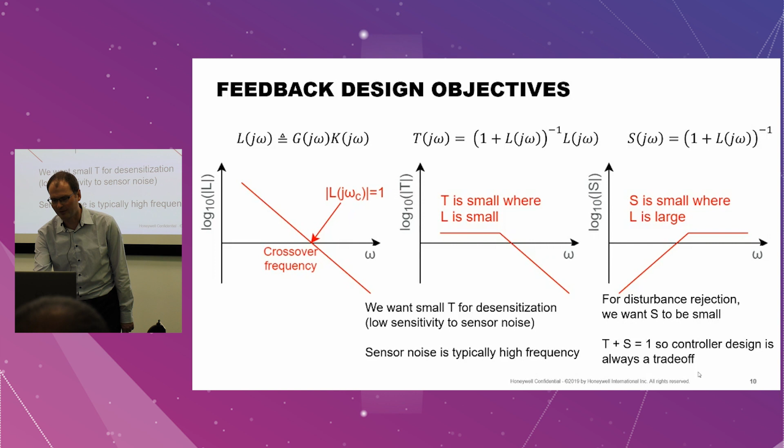What we try to do with our control system is parameterize it so we don't have to design everything from scratch every time we get a new aircraft design. Even though I'm working for two customers right now, it doesn't mean we're designing two aircraft - there are many iterations of every design. Every six months or every year you have a different aircraft design almost, so even for each customer, because they're also in their development process, we need to keep up with that and quickly adapt our control law. So this is our basic desired dynamics control loop.

As I was saying, basically we are trying to parameterize it as much as possible. So this is essentially a PD controller, proportional and derivative, PI controller, proportional and integral controller, where we have this proportional path, which we call command, and we have this integral path.

The proportional part basically ensures that we're tracking our commands, and the integral part basically rejects any disturbances that happen. So if there is a steady state error, basically that integral path will drive it to zero and reject any long-term disturbance. Then we have this bandwidth gain, which is basically how we set our crossover frequency.

So that's the only parameter that we really have to optimize. Everything else, all these fractions, the integral fraction, command fraction, and also this anti-windup, which is there for the purpose of preventing the integrator from winding up when the aircraft is not able to follow some command because it's on a limit. Like let's say you're asking it to accelerate, and already the engine is at the maximum power.

If you keep winding up that integrator, then eventually, if you want to stop accelerating, you will stop commanding the acceleration, but because the integrator has wound up, it will keep on accelerating. So even if you now want to decelerate, it will just keep on accelerating.

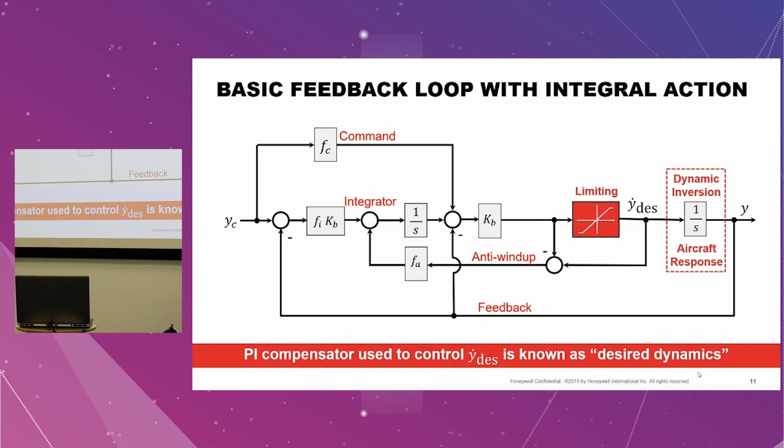Okay, so the important thing here is that the input to that dynamic inversion is the derivative of what we want to come out of the integrator, right? So this is basically what we call y-dot desired, or also controlled variable derivative, and this aircraft response that we're controlling, that's called the controlled variable.

The controlled variable could be, for example, velocity, or it could be position, or it could be angle, or it could be angular rate, like how quickly the aircraft is rolling, how quickly it's pitching, how quickly it's yawing.

So depending on what we want the pilot to be able to command, usually now for these electric vertical takeoff and landing aircraft, it's velocities or accelerations, because that's the simplest thing that the human can think of.

And if you're, for example, I don't know, how many people here fly drones, or have a drone for camera drone or something like that? Nobody? Okay, never mind. But basically, if you, a consumer drone, basically you're commanding usually velocities.

So because it's really simple, you can learn it in five minutes, basically. So if you let go of everything, it will just hover in place. So we're doing the same thing with these aircraft, basically.

But on a fighter jet like the F-35, the pilot would typically be commanding angular rates, because we want the pilot to have a bit more control, so they would be commanding, let's say, different parameters.

Okay, so now I've talked a little bit about these gains. Basically, we set this bandwidth gain such that we get the crossover frequency that we want. So if the crossover frequency is too high, it means that then we get issues.

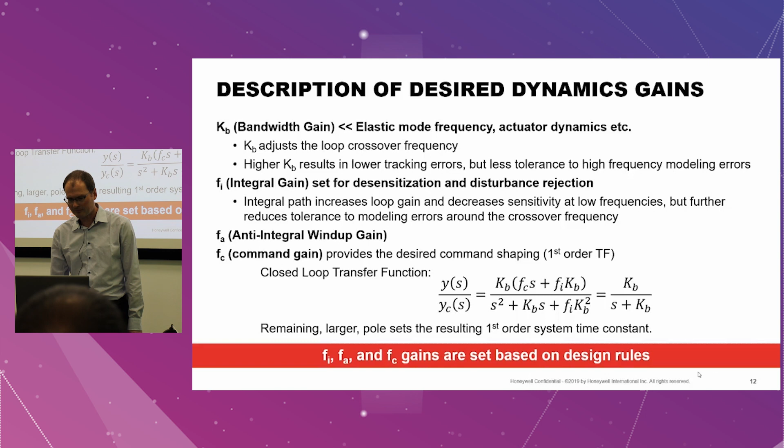So basically, that's the importance of setting the bandwidth gain. And then the other gains have already been designed such that the system reacts as a first order, or as a perfect transfer function of 1, which is basically a perfect response. So those are these gains. Now the dynamic inversion piece is, let's say, the most complicated part.

It relies on an onboard aircraft model. So we get from our customer the model of the aircraft, because when we're developing the control law, we also need the model for our plant, for basically what we're trying to control. So we need some simulation of the aircraft.

Otherwise we wouldn't be able to test that what we're doing is actually working. So since they already give us the model, we use it for two purposes: for our simulation, but also we use it in our control law, basically as a means to create this dynamic inversion in real time.

So the onboard aircraft model is running on the flight control computer, and what the flight control computer does is that basically every frame, or every time step, it'll simulate what happens if you move one effector, let's say one control surface 1 degree up, and it will measure or compute what the forces and moments on the aircraft will be. Then it will, let's say, increase the RPM on one rotor by 10 RPM, and measure what would then happen. And it creates what we call the B matrix like that.

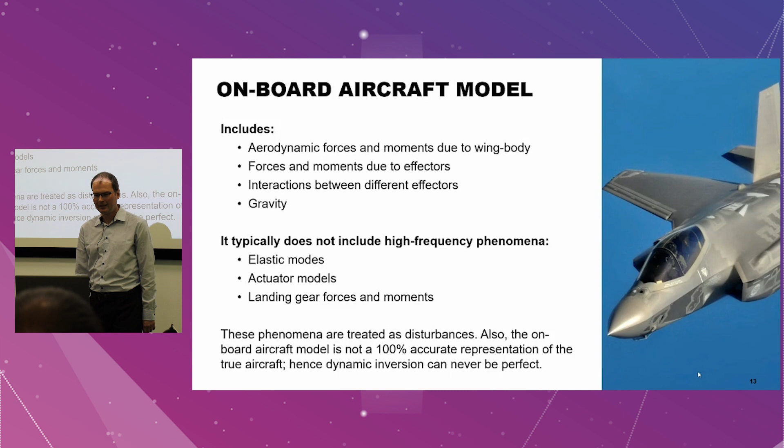To simplify it a little bit further, because it's already complicated enough, let's say we have a customer with 28 moving parts on their aircraft, and our computing power is just getting to its top now - we can't ask for more.

So we can slave effectors together. For example, if one surface deflects up, usually we want the other on the other side to deflect down. We can do that, but then we lose redundancy - if one of them fails, we will not be able to use the other in an intelligent way to compensate.

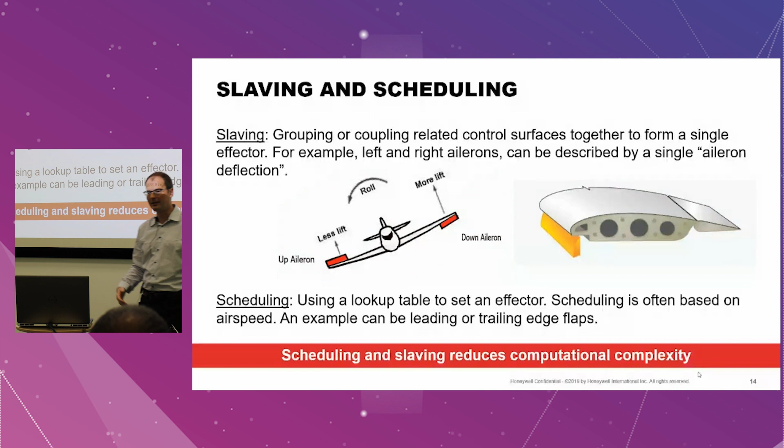But we can do it in some cases, and we can also schedule some effectors. For example, we can change the blade pitch angle on the rotors as the speed changes, because that's always going to be done the same way - it doesn't need to be controlled in an intelligent way. So we can do some things to simplify it and take the load off the main control law, so it doesn't have to work as hard.

Okay, so now some more math about dynamic inversion. This is what we call a state space representation. X is basically the states of the aircraft. Typically we have 12 states - 3 positions, 3 velocities, 3 angles, and 3 angular velocities.

Sometimes the 3 angles can be represented in a different way - we use quaternions, so those would be 4 states, giving us 13 total states. And x dot is the derivative of the states. So this is essentially our aircraft model.

We have some A matrix times our states plus the B matrix times our effector commands, and that gives us some state derivative. So if we want to roll the aircraft to the right, we have some roll angle, and we deflect some control surface - it's already rolling. We deflect some control surface, that produces a moment, which is equivalent to an acceleration - let's say a roll acceleration - and that's going to be this x dot.

And then y is what we're trying to control, which is basically typically a function of these states. So the C matrix times the states. And what we do with dynamic inversion is that we know what we want, and that's the y, basically, and we just need to get to what u is then, what are the commands to the aircraft. So we invert these equations.

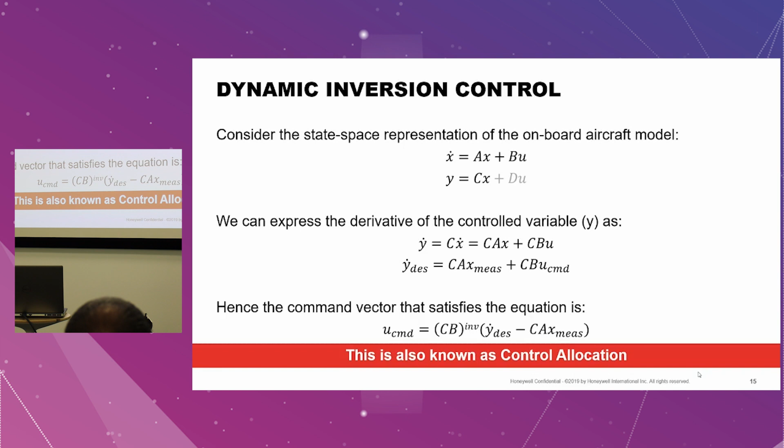So that way it's up to date. And if there is a failure or any limitation on any of the effectors, it's taken into account. So let's say you can have one rotor failed, for example, then we take that into account in this B matrix. We just say, okay, that rotor has no more effect, or it has just this effect, you cannot control it anymore. So then the control allocation will automatically use the remaining controls, and so you don't have to have a special control law for every failure. It's the same control law.

We just set a different limit on an effector, or different limits. What is the maximum and minimum RPM? Usually that would be the measured, whatever it has failed to do. So let's say it's still spinning, but it's just spinning because of the wind. So that's what we can give to that rotor, and everything we can do is just going to be distributed in the other effectors. And that has already been put to a lot of use in one of our projects.

It's had multiple failures, I can say, and it has been able to mostly cope with that. Obviously, all only within what the aircraft is capable of. So if the aircraft cannot give you enough vertical thrust, and you are hovering with no airspeed, and suddenly you lose too many rotors, then the only way is you're gonna go down. But at least the control law can do the best in that situation, so it can still keep you straight, level, and just minimize the vertical speed. So there's always these aircraft limitations that we cannot overcome.

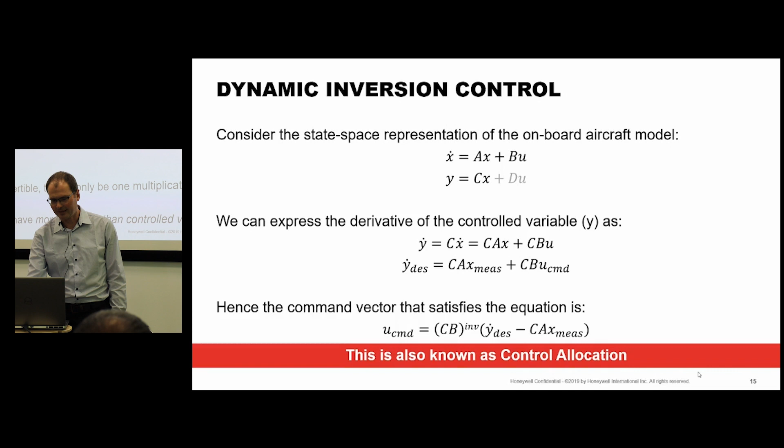Okay, so I've already talked about this. Yeah, and so this is just a detail that this CB inverse, it's not a square matrix, so we're not doing a direct inverse, but we're doing a pseudo inverse, basically, which means we have this weighting matrix, and that can basically tell us how much we want to use different effectors.

So, like for example, let's think of a little bit different example. We have this hovering aircraft that has 4 things it can do. It can tilt nose down or up, left or right. So that's 2. It has a force up and it has a force forward.

And let's say we want for the passengers to be comfortable. So when we accelerate forward, we don't want the aircraft to go nose down, because normally a drone, when you try to go forward, it will just pitch down and keep going forward. But we have these means to create forward thrust. So we can say, okay, we want the pitch angle to be ideally like this, so that you can sit comfortably, and then you can modulate just the forces, the vertical, the forward force, and the bank angle to give you the response that you want.

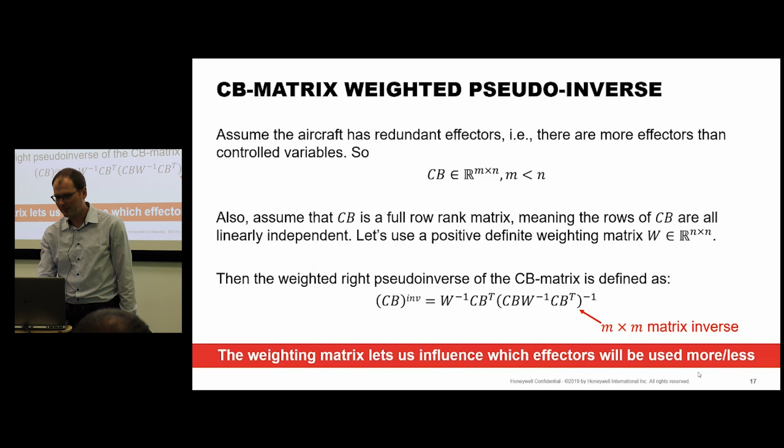Okay, and the final, let's say, summary. So by the way, this is the RMAX helicopter. This was another project, a past project. This is a Japanese helicopter, which it's used for agriculture, crop dusting, and so on.

And it's completely autonomous. So dynamic inversion basically allows you to quickly reuse the same control law. The desired dynamics is the same, and the only thing that changes is the aircraft model, or the onboard aircraft model. It allows you to basically very quickly create this for a new aircraft.

But obviously the drawback is that it requires the aircraft model, so it has to be accurate. If it's not accurate, then you have an issue, because if you have a mismatch between the reality and the model, it will accept some level of mismatch, but beyond a certain level, it becomes unsafe. So we basically need to measure how much mismatch we can still live with, and then we ask our customers to basically provide the model within that accuracy.

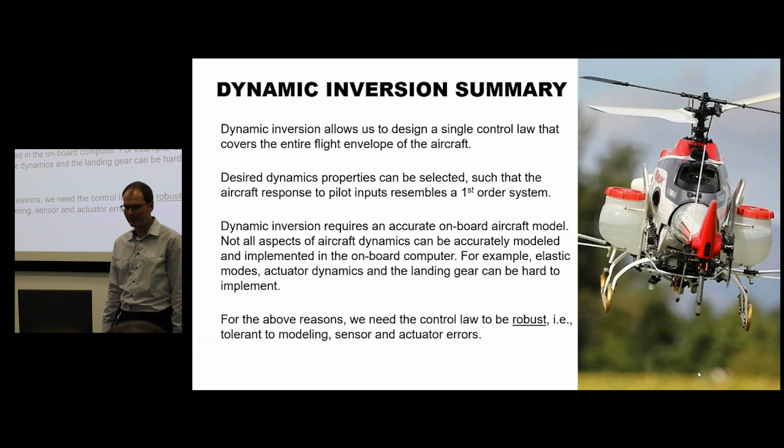We don't model these high frequency phenomena, so we need to be able to react to them in other ways, which is basically by using feedback.

We have these uncertainties. For example, when we implement the aircraft model in the flight control computer, there are some lookup tables that don't have an infinite size, so obviously there will be some approximation. We also don't model these actuator and sensor dynamics, elastic modes, and the flexibility of the aircraft structure.

We also don't know exactly the weight and the center of gravity of the aircraft, because depending on how many passengers and how much luggage, you can't really weigh everyone before getting on board. So we have to accept some mismatch there. We design it for some middle ground, but one of our projects is a cargo aircraft, where there has to be some input from the operator that will tell it approximately what the weight and center of gravity is.

And yeah, we also don't know the air density perfectly, because we can only measure temperature, pressure, humidity, but we cannot know exactly. And we also don't know wind until it's already there. So we actually have an estimator of wind, which uses the onboard aircraft model, which is quite a sophisticated thing also, but it's still only got some accuracy that's not always perfect. So we need to be able to cope with those uncertainties.

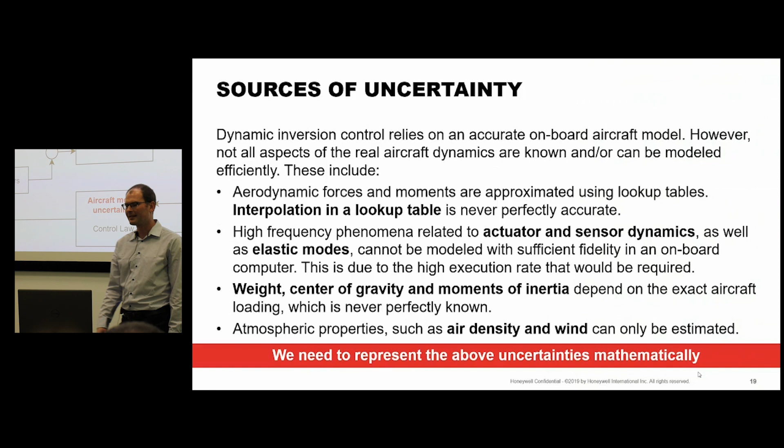Sure, so my question is, why a first order system? We can easily model it as, let's say, if we want to model linearly, we can have a second order system, and then we will get more options for the poles or the zeros. Right, can you repeat please? Yes, so the question is why we use the first order system and not a multiple order system.

Right, so actually, what I was presenting here is a little bit of a simplification. The desired dynamics part, which I was showing you, we use it four times. We use it nested inside of each other. So we have an inner loop which controls angular rates, a loop around it which controls angles, another loop around it which controls velocities, and another loop around it which controls position. So basically, it then becomes a 4th order system.

But you could do all that with one set of loops, like you could just have that at one level. That's a choice. So you could do it like that, but you can also do it like we do it, which is basically just do the first order approach, but then nest it inside of each other. So yeah.